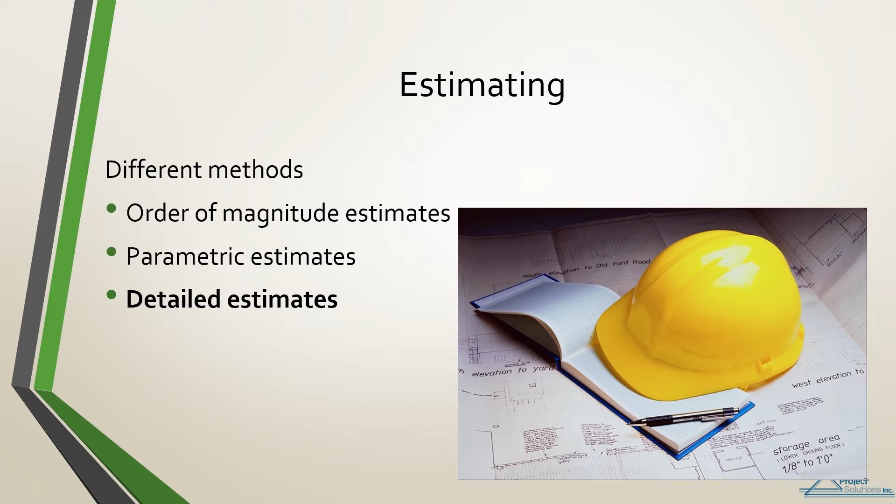This estimating module discusses instructions for detailed estimates. Detailed estimates are the estimates in which construction bids and negotiations are based upon. Once the project is underway, the detailed estimate also forms the basis for project cost control. A detailed estimate breaks down a project into each of its component elements, quantifies those elements, and then prices them out. The elements that the estimate is divided into are more or less up to the estimator. The basic rule of thumb is that if it's different, keep it separated.

The steps to completing a detailed estimate are: review the contract documents, perform a pre-bid site visit, attend the pre-bid meeting if one is offered, develop a bidding strategy, solicit a prime contractor unless bidding is prime, notify your bonding agency, estimate the general conditions, perform a quantity takeoff from the plan set, determine the units of measure, determine prices

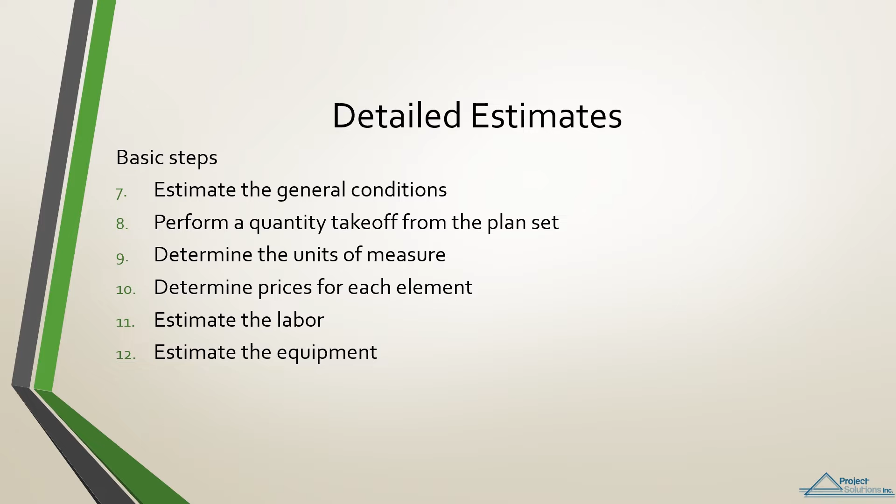for each element, estimate the labor, estimate the equipment, determine overhead, determine the acceptable level of risk, determine the markup for profit, calculate markup for bond, and finalize your estimate.

These are the basic steps used by most construction contractors. Of course, every company does their estimating a little differently, and these steps are not necessarily performed in sequential order. We will cover each of these steps so that no matter what your trade, you can successfully estimate a job.

Number 1. Review contract documents. When preparing an estimate, the critical contract documents include specifications and drawings and plans. As a bidder, it is the responsibility of the contractor to know and understand what is included in the contract documents.

The project manual or spec book provides instructions on how the prescribed work is to be performed, including material and equipment requirements and any restrictions or conditions on that performance, how the quality and acceptability of work will be determined, allowable tolerances and how deviations from these tolerances will be handled, how payment for work will be made, how changed conditions are to be handled.

Because specification books are often inches thick, many contractors only read the section that affects their trade. It is imperative, however, to review all specification sections before you sign a contract. You are contractually liable for all requirements included in the complete document. The General Conditions section, for example, contains contractual requirements for job site safety, submittals, cleanup, change orders, and how to get paid.

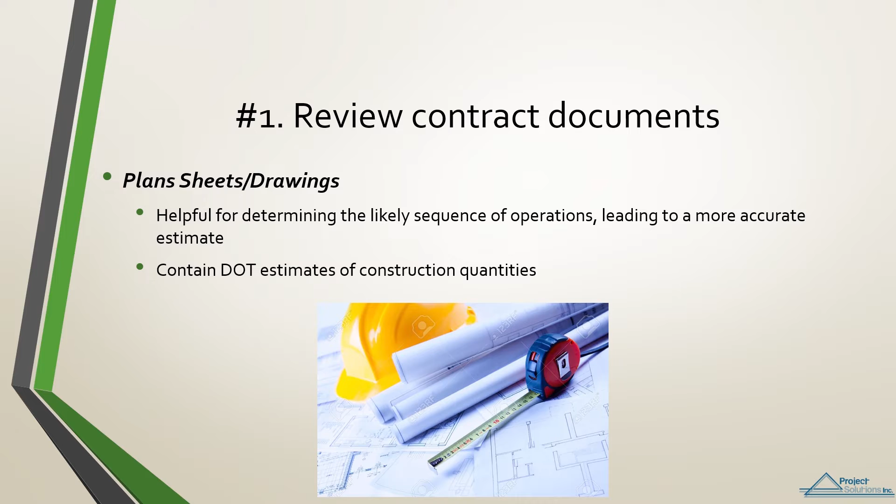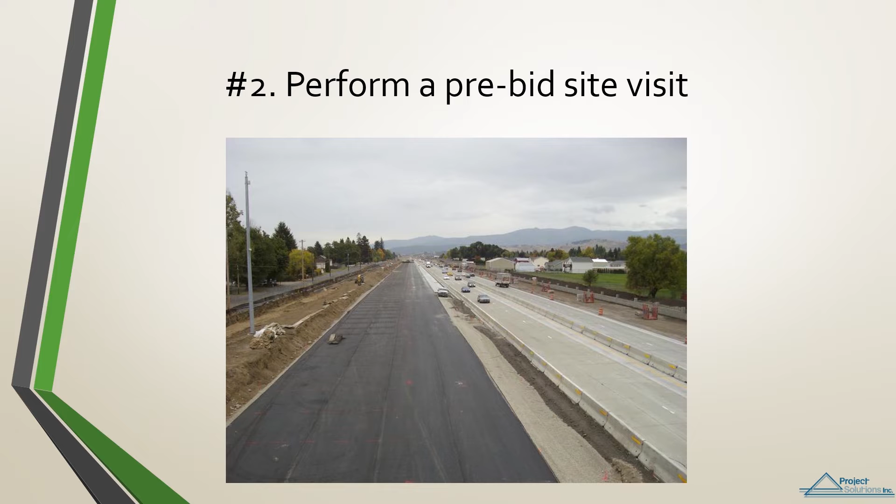Number 2. Perform a pre-bid site visit. This may seem obvious, but this step is often overlooked by contractors who are either inexperienced or overly confident that they know the details of a particular project. Visiting the proposed job site is critical to a successful estimate, as it may bring to light concerns that are not readily apparent in the contract documents.

The following is a list of some of the items that contractors should check for when making a pre-bid site visit. Actual travel distance from the office shop to the job site, and will per diem or lodging need to be provided to on-site workers? Is there adequate access to the job site, or will an access road need to be developed? From a visual inspection, what are the soil conditions?

To what extent are the clearing and grubbing requirements? Is the site mostly grass, weeds, or are there a considerable number of trees? What is the average diameter of the trees? Are there nearby sources of water and power? Are telephone lines available? What about cell service and internet? Are there nearby wetlands, streams, lakes that need to be protected? How far is the job site to an adequate waste disposal area?

If additional labor will need to be hired, is there an adequate supply of labor in the area? Is equipment rental available? And how near is it? How far will contractors and suppliers need to transport materials? Are there nearby sources of concrete and lumber? What security measures will be needed for the site? And will you need traffic control and/or flagmen?

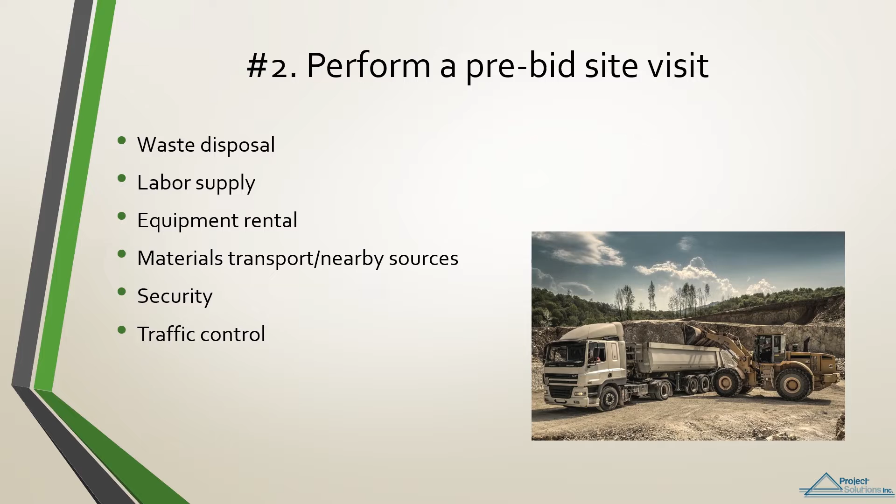Number 3. Attend the pre-bid meeting if one is offered. Pre-bid meetings are gatherings scheduled after an invitation for bid or request for proposal is advertised. They are called pre-bid meetings because they are pertinent to procurement of goods, non-consultant services, and works. When they are scheduled for consulting services, they are called pre-proposal meetings.

These meetings, also called conferences, are scheduled during the preparation of the solicitation documents, which are the invitations to bid or requests for proposals. On those, the date, time, and venue are mentioned so that all prospective bidders and consultants can become aware of them. The objective of pre-bid meetings is to explain the details of the solicitation documents to interested bidders.

Prospective bidders are permitted to request clarifications on the invitation for bids or request for proposals by a stipulated date, and the pre-bid meeting is held within that period. Perhaps most importantly, the pre-bid meeting is where you'll meet the decision makers for the project and have an opportunity to sell yourself.

Number 4. Develop a bidding strategy. There are 2 ways to look at bidding and bidding strategy. The short view, or the get the contract first and worry about the details later, is for the inexperienced bidders. Of course, some details are unforeseen and must rely on decisions made in the field, but this should be the exception and not the rule. An experienced, successful bidder will use the long-run strategy by incorporating planning into the details of the bid.

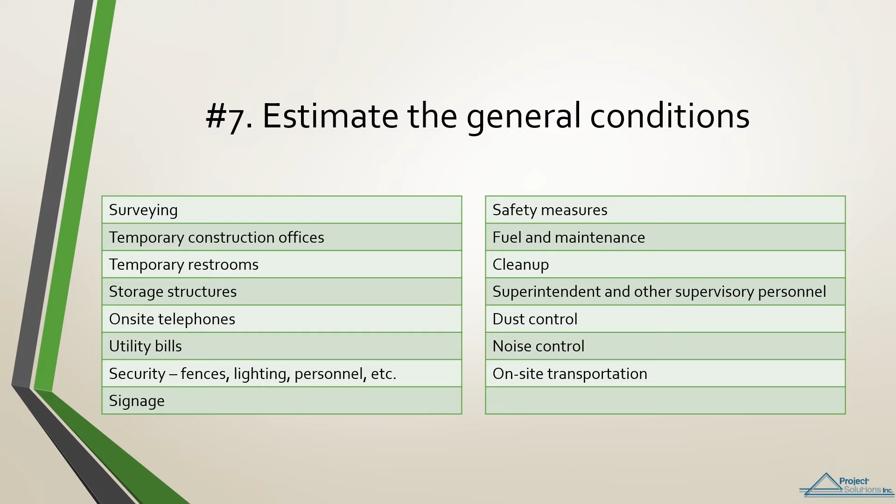Number 8. Perform a quantity takeoff from the plan set. The quantity takeoff, or quantity survey as it's sometimes called, provides the backbone for the detailed construction estimate. The quantity takeoff is where estimators determine the total number of individual work items to be completed, total number of construction materials needed, and so forth.

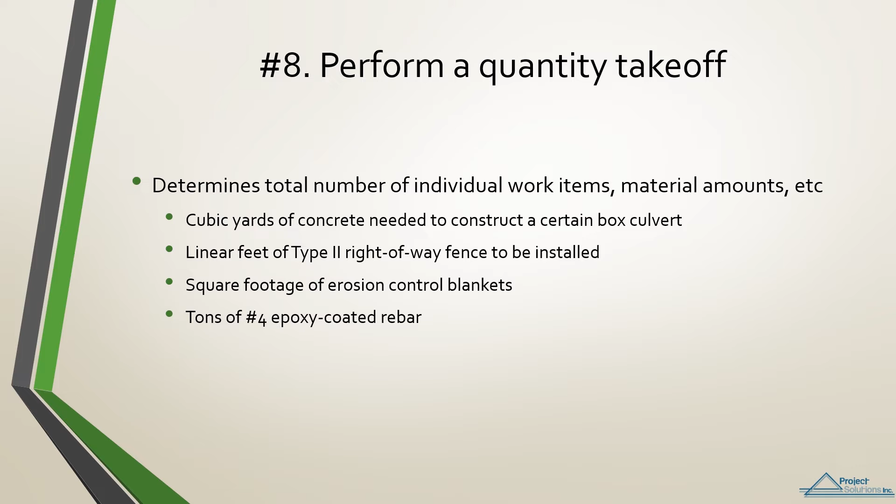Examples of items that might be determined in a quantity takeoff might include cubic yards of concrete needed to construct a certain box culvert, linear feet of Type 2 right-of-way fence to be installed, square footage of erosion control blankets, tons of number 4 epoxy-coated rebar. For a given project, there are hundreds of items that are quantified in the quantity takeoff. When performing an estimate, quantity takeoffs usually take more time than any other task that the estimate involves.

Luckily for highway contractors, most DOTs go to great lengths to produce various tables that contain estimates of construction quantities, which they place in the plan set. Most of these estimates of quantities come from the plan and profile sheets in the construction drawings. A note of caution though, when performing a quantity takeoff, do not merely reference the estimates of quantities. A careful estimator will also make a detailed reference of the plan drawings and plan notes. There are a couple reasons for this.

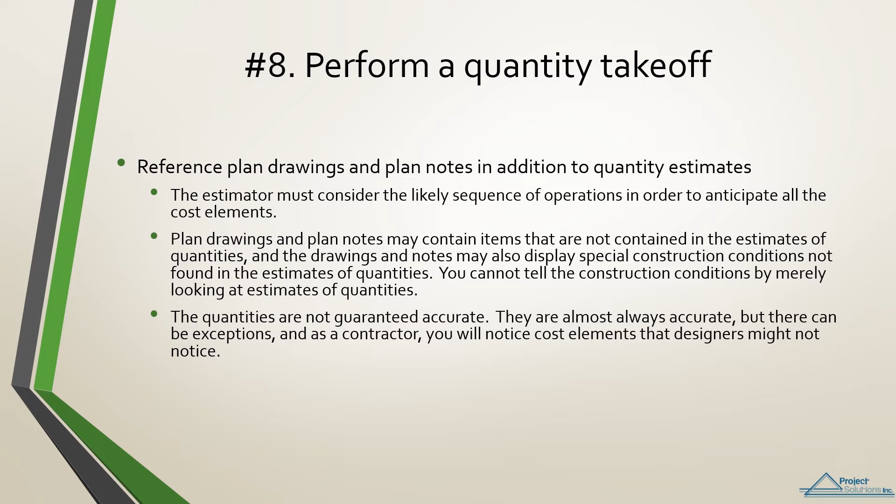The estimator must consider the likely sequence of operations in order to anticipate all the cost elements. Plan drawings and plan notes may contain items that are not contained in the estimates of quantities, and the drawings and notes may also display special construction conditions not found in the estimate of quantities. You cannot tell the construction conditions by merely looking at the estimate of quantities. The quantities are not guaranteed accurate. They are almost always accurate, but there can be exceptions. And as a contractor, you will notice cost elements that designers might not notice.

The quantities listed on quantity takeoffs can be thought of as real materials such as concrete, base course, or fencing, or aspects that require work, such as finishing concrete or grading. Obviously, not all quantities can be found on a plan set. Finishing concrete, for instance, is a quantifiable element that's not necessarily drawn on a plan set, but that you know needs to be done when you see an exposed slab of concrete. Elements cannot be quantified without first considering how the construction work is likely to proceed.

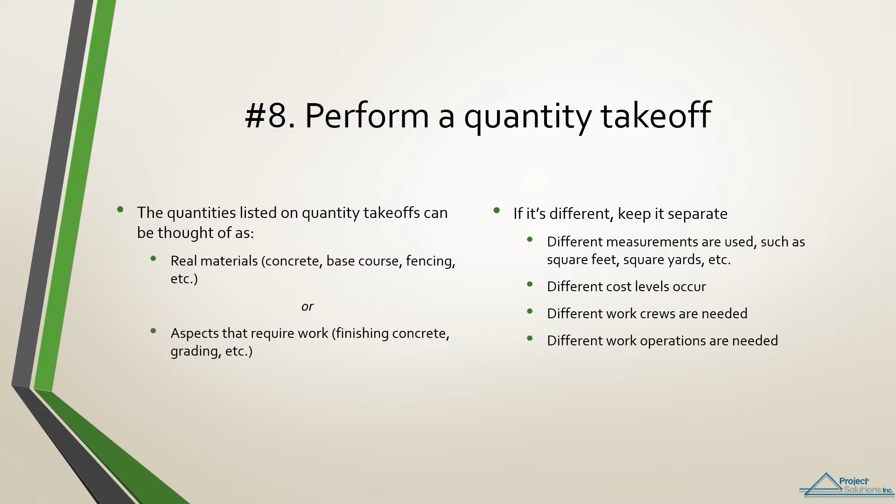The goal of the quantity survey is to name and separate the quantities of a project for one purpose: pricing them out. The materials and other cost elements must be separated in a logical format. Where should separation occur? If it's different, keep it separated. Good points of separation are when different measurements are used, such as square foot and square yards, different cost levels occur, different work crews are needed, and different work operations are needed.

If the quantities are wrong, the entire estimate will be wrong. Regardless of how accurate the pricing information may be, if it's not multiplied to the correct quantities, the estimate will be inaccurate. It is not easy to backcheck a quantity survey. Often, it is cost prohibitive to do so. Therefore, a quantity survey must be performed carefully and systematically the first time it is performed.

Don't be afraid to mark up a plan set. It's not a museum piece, and if your firm is serious about performing the work, you will need multiple copies anyway. Use colored pencils to help you divide up the elements on the drawings. Follow a logical order. Complete big picture items first. Estimate each drawing in a consistent fashion.

For instance, let's say you are estimating fencing. Your method may be to start in the upper left-hand corner and go in a clockwise direction, checking all the elements that involve fencing. Use this same method for each drawing. Use decimal equivalents to make your math easier. Instead of using 2 feet 3 inches, use 2.25 feet.

Do not use scratch pads. You need to be able to review your work, and you should be performing your work in sufficient detail that a scratch pad shouldn't be needed for calculation purposes. Try to visualize the method in which the construction work will progress. This will help you discover items that may not be included on the plan set, such as finishing concrete, and will help you determine other cost control elements.

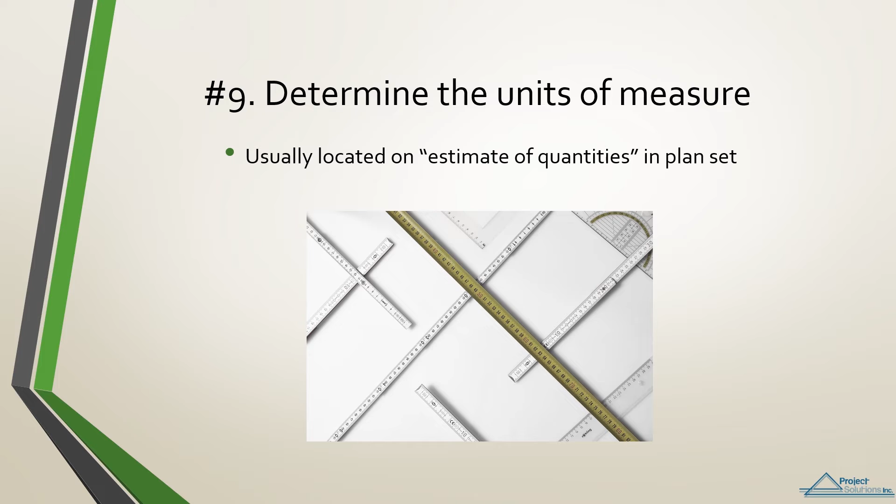Number 10. Determine prices for each element. The contractor is almost always required to provide the materials for a construction project. Material pricing is usually fairly consistent. However, unit prices should be checked against the current prices of vendors that will be used. Sources of material cost information include company records, local vendors, and cost publications such as RS Means, BNi Building News, Sweets, and Walker's.

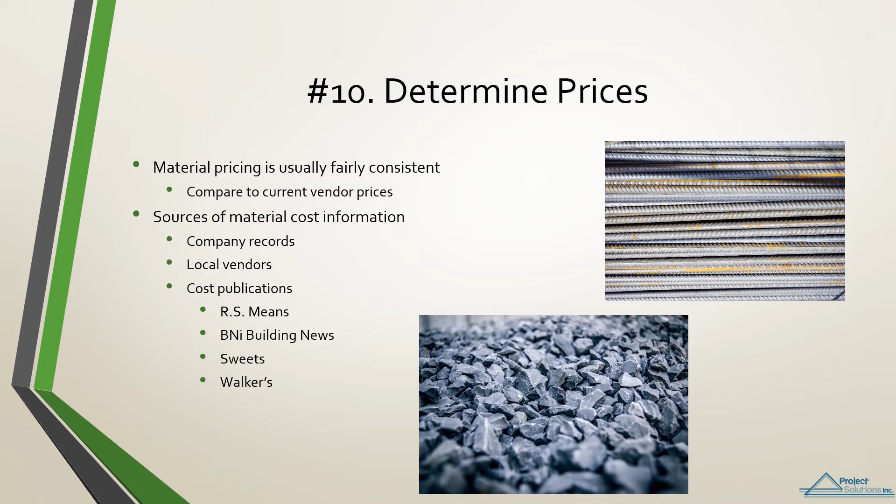Other factors that the estimator should consider when determining material costs include regional differences in availability. There are regional differences in prices for many construction materials because certain materials are more readily available in some areas than others. Southern pine lumber does not cost the same amount in South Dakota as it does in Georgia. With that in mind, it is a good idea to check your local vendors or company historical data for major purchases when performing your estimate.

Transportation costs: another consideration, especially for rural highway projects, is the cost to transport construction materials. For instance, if the project is a small stretch of highway 40 miles from a decent-sized city, there probably aren't any concrete batch plants within the vicinity, and unit prices for ready-mix concrete will be increased.

Storage. An often overlooked element of material cost is the cost incurred by contractors to store the materials. The materials will be shipped from the vendor to your site, but then what? You will need to store those materials until you actually use them. Is there room at the job site to store materials? Usually on rural projects there's ample space, but what if the project involves a highway through a downtown area?

Do you need a staging area, or are you going to have to time the arrival of your materials with the placement of the materials? Do you need facilities such as sheds or work boxes to store those materials? These are all factors that need to be considered. As far as how to actually consider the factors, you need to be aware of the site conditions, another important reason for the site visit. You need to contact your suppliers, and your company needs to have some experience performing that type of work.

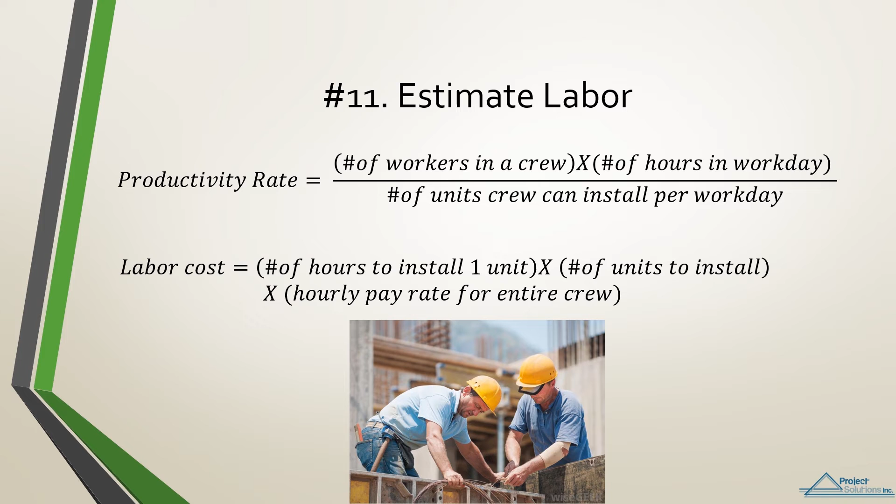Number 11. Estimate labor. There are three main components of estimating labor: determining labor productivity, labor rates, and then using those results to determine labor costs. Labor productivity is the rate at which crews can produce work. Labor productivity can be estimated by taking the number of workers in a crew and multiplying by the number of hours in a workday, then dividing by the number of units the crew can install in a workday.

Let's look at a couple examples of determining a productivity rate. Example 1. A fencing contractor has a crew of 3 workers. They will work an 8-hour day and can install 200 linear feet of permanent fencing per day. Workers get paid on a per-hour basis. Therefore, labor productivity must be known on a per-hour basis. So the contractor must know how many linear feet of fence the crew can

install per hour. 3 workers times 8 hours a day divided by 200 feet of fencing per day. This says it takes 0.12 hours per foot. Multiply that 0.12 hours by 60 minutes per hour and you will get 7.2 minutes to install 1 linear foot of permanent fence. This is an average time and there will be some variance. This productivity rate considers paid breaks, walking to the truck to get supplies, water breaks, midday chatter, and other variances because it was computed using the average number of feet installed per day.

Second example. A mason crew is comprised of 4 masons and 3 laborers. They work an 8-hour day. They can install 580 bricks per mason. Like the previous example, workers get paid on a per hour basis, and therefore labor productivity must be known on a per hour basis. How many bricks per hour can the crew install? A key point to this example is realizing that each mason can install 580 bricks per day, not each worker on the crew. 7 workers times 8 hours per day divided by 580 bricks times 4 masons equals 0.024 hours per brick.

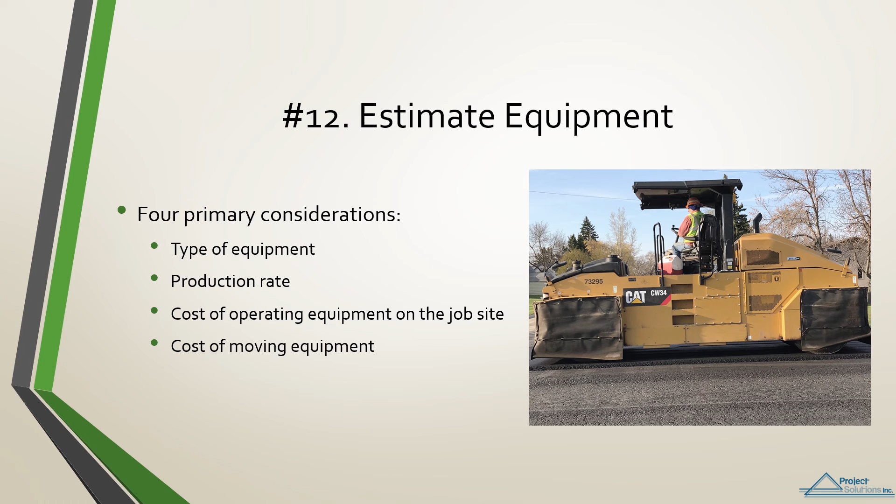Determining the cost of moving the equipment to and from the job site. Mobilization to and from the job site can be expensive, especially for large pieces of equipment and for transport over large distances. Company records and quotes from transport firms will aid in this estimation. These costs are then spread to the unit cost, hourly or daily, of operating the equipment.

Number 13, determine overhead. For the purposes of this training, overhead will refer to home office overhead as opposed to job site overhead. Job site overhead, also called general conditions, is covered in the general conditions section and calculated as a separate component of the estimate. Overhead represents the fixed cost of being in business that cannot be charged to specific projects. These expenses are usually incurred regardless of the amount of work the organization is performing.

Overhead expenses might include equipment, salaries and benefits of office personnel, such as office administrators, estimators, or executives, home office purchase costs or lease costs, home office utilities, insurance, advertising, charitable donations, or other miscellaneous expenses.

Overhead costs do not appear in estimates. Rather, they are included as part of an overall markup. The markup can occur on a lump sum basis or on an individual cost element, depending on the bid documents issued by the owner. Overhead costs are only roughly computable. As a standard business practice, every contractor should know what their overhead costs are over a period of time. Then, anticipating how much business they will do over that same period of time, a percentage of markup can be applied to each project, such that the summation of all the overhead markups covers their actual overhead costs.

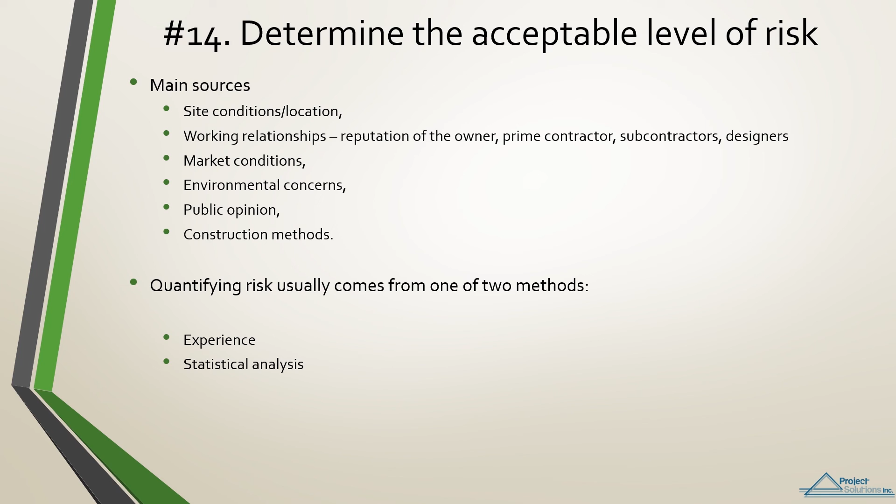Number 15. Determine the markup for profit. Estimating the profit on a job is a strategic decision handed down by company management. The profit is usually estimated as a percentage of the total bid amount. The percentage depends on many factors, such as anticipated competition for the job, company workload at the time of job performance, current marketplace trends, familiarity with the duties to be performed, strategic desire for the company to grow or to downsize, strategic desire for the company to break into a new market.

This is an incomplete, non-comprehensive list intended to give you an idea of the concepts that shape the amount of profit that is figured into the bid amount. For the estimator, it is good to know that the profit markup is handed down from company management as a result of strategic thinking.

Number 16. Calculate the markup for bond. With most projects, the burden of bonding is carried by the prime contractor. Therefore, as subcontracting DBEs, markup for bond is not typically an issue that will need to be addressed. When it is necessary to calculate bonding for markup, the cost is computed as a percentage of the total bid amount, typically between 0.4 and 0.8%. The exact percent is determined through agreements with your bonding agency.